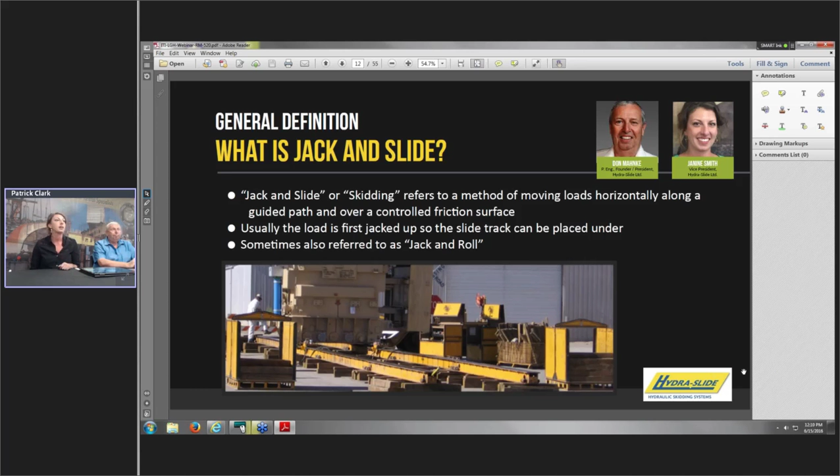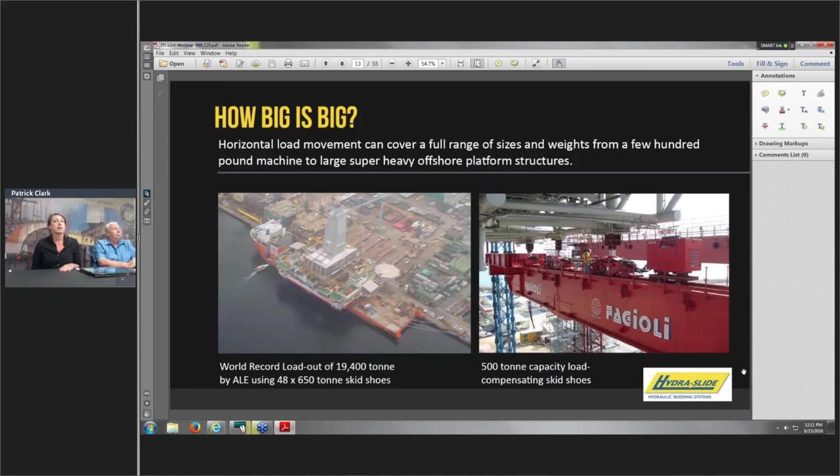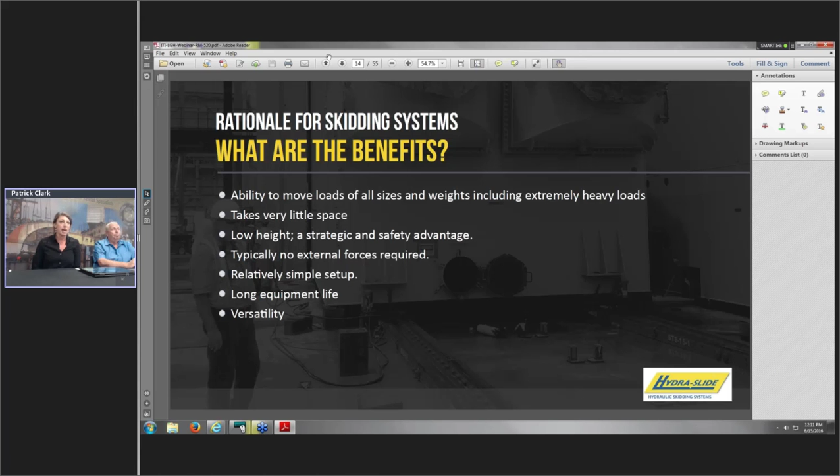Some of the benefits of using a skid system over other methods: a skid system doesn't care what it's moving. It can be used to move transformers, vessels, components of oil rigs, refinery components, machines. Everything moves exactly the same way.

They take up very little space, a very small footprint. You'll see a closer detail of the layout of the tracks and components of the skid system. Very low height — the Hydra-Slide systems have a maximum profile of 8 inches on the heaviest tracks, and it can go down to a 1-inch profile as well.

Typically there are no external forces required when using a skid system. With rollers, if you're rolling something on a low friction surface, it's not necessarily going to move laterally as intended — depending on ground support and other factors, you may need winch lines or holdbacks to stop that movement. With a skid system, it's a simple setup.

Mobilizing a crane is a job in itself — it takes a lot of time and money. In some situations it's your only option, but in others where a skid system can be used, your setup is very short and simple.

Our equipment lasts a very long time. The first systems built by Don are still being used in the field, and that's going on 30 years ago. There's a little hydraulic component maintenance and some graphite on the tracks, but not a lot of things to fail or need maintenance on a slide system. They're extremely versatile — a slide system can move pretty much anything of any size.

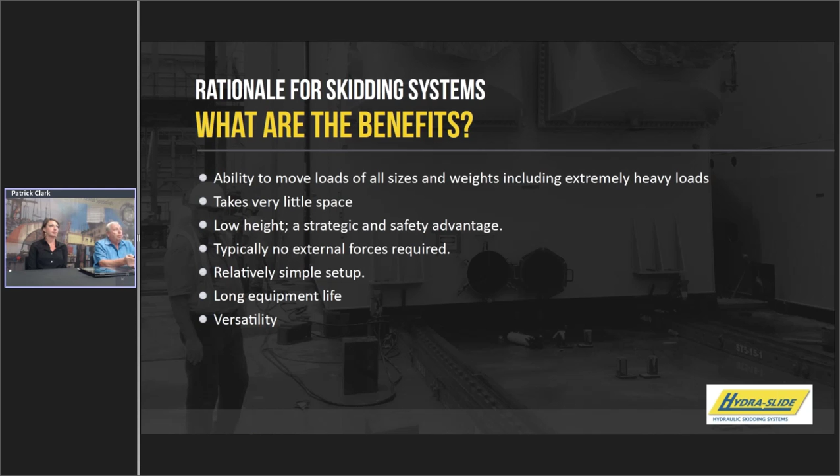If I asked most people to recite Newton's three laws of motion, most probably couldn't. But if you look at what they are, you'll recognize them right off — they're really much more of a common sense thing.

His first law: an object will remain at rest or move at constant velocity unless acted upon by an external force. Pretty basic. The second law: acceleration and force are vectors — meaning they have quantity and direction. So if you're talking about force, it's a force in a certain direction with a certain quantity.

The third law: for every action there is an equal and opposite reaction. This comes into play a lot in moving loads, because if you push against something, technically it pushes back on you. So it's often that back-force push that you really have to deal with.

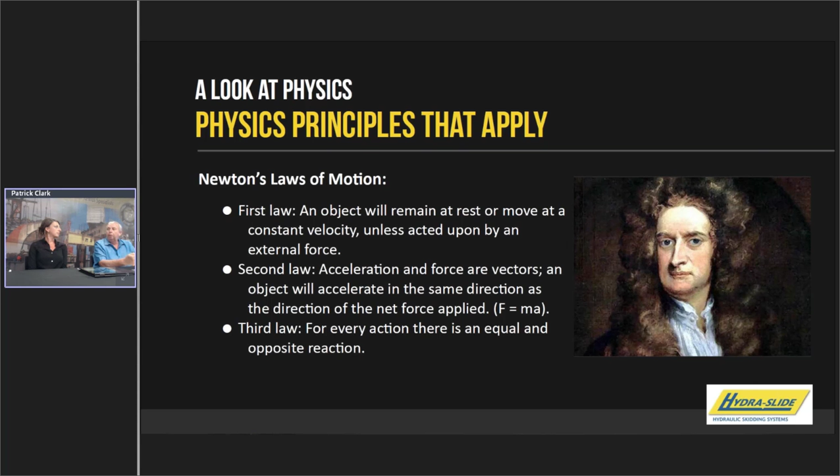Along with that, if you extend that a little bit further, we can talk about inertia. Inertia is a tendency to do nothing or to remain unchanged. And that is right back to Newton's first law.

And then we get led into momentum. That's a quantity of motion of a moving body, and it's measured as a product of its weight times its velocity. It really means that if you've got something with some weight that's moving, it's got what we call momentum. And I think everybody understands what momentum means. The really important part of it all is the energy that's involved.

If we talk about kinetic energy, that's the energy that something possesses by virtue of it being in motion. This is calculated by its weight times the square of its velocity. So if you've got something moving at, say, 1 mile an hour, if you double that to 2 miles an hour, it's got 4 times the energy. If you double that again to 4 miles per hour, it's got 16 times the energy.

So this is where, when we're dealing with heavy weights and horizontal moving, we really want to keep the speed to a very minimum to keep the energy levels down.

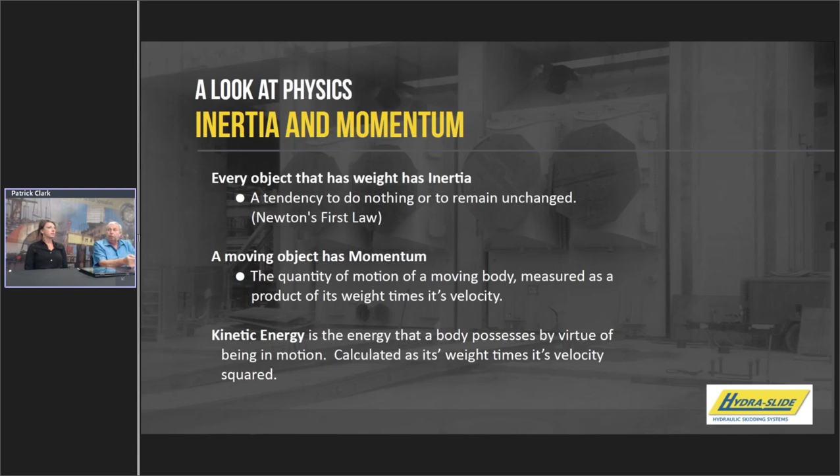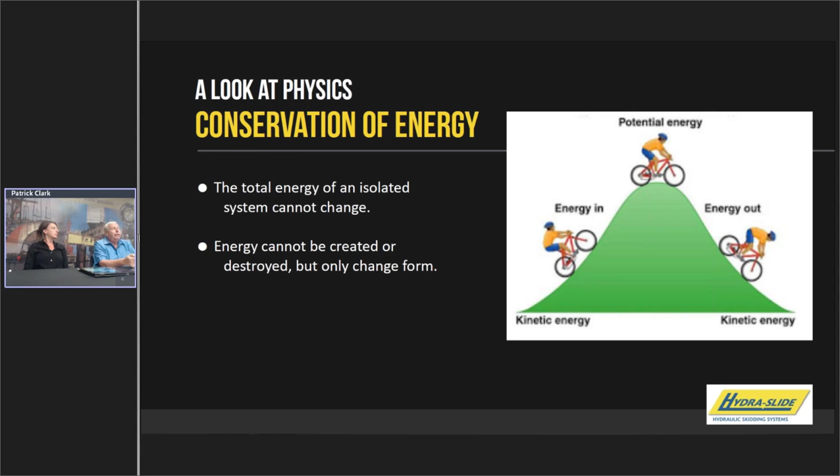Also, when we're talking about energy, there's 2 different kinds. There's potential energy that's really due to its height. This is where it comes in with cranes. If you're lifting an object to a height, you're putting potential energy in it that can then be translated. If it's released, it falls down and it builds up what we call kinetic energy, and the further it falls, the more energy it's going to have. And again, this kinetic energy is what we really have to watch out for.

And further, this is getting a little bit more into what we want to talk about today, which is friction. Friction is the force resisting the relative motion of 2 surfaces sliding against each other. And we'll often refer to the coefficient of friction, that's the ratio of the force of friction divided by the weight of the load.

And when we talk about skid systems, we're normally working in the range of 10 to 20% coefficient of friction. What this really means is if you're moving something that, say, weighs 250 tons, and you've got a coefficient of friction of 20%, the force required to move it is 50 tons. So it's going to take you a force of 50 tons to move that 250-ton load.

On the same hand, if you're moving that 250 ton on that friction, it's also acting like a braking force. It's an automatic brake. So if you stop pushing something, this friction is going to be acting like a 50-ton braking force to keep it from moving further.

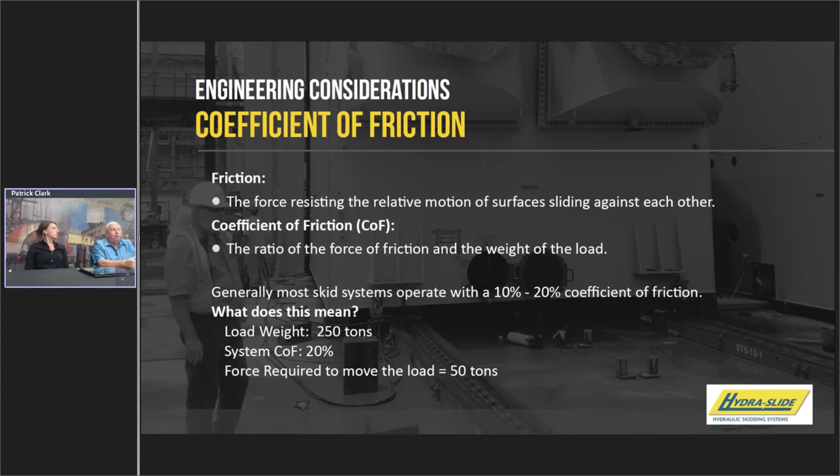So when we look at skid systems, and we'll look a little bit more at some of the applications later on, but just so we know what the components are.

And that's, as we call it, a controlled friction surface. It's something that is pretty much a known quantity and doesn't change much. It will change a little bit as it's wearing down. Humidity will affect it a little bit, but essentially you're in a controlled friction arrangement there.

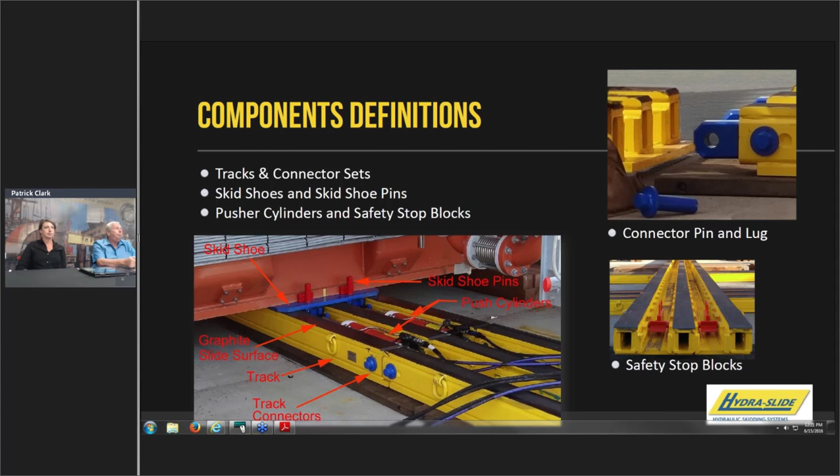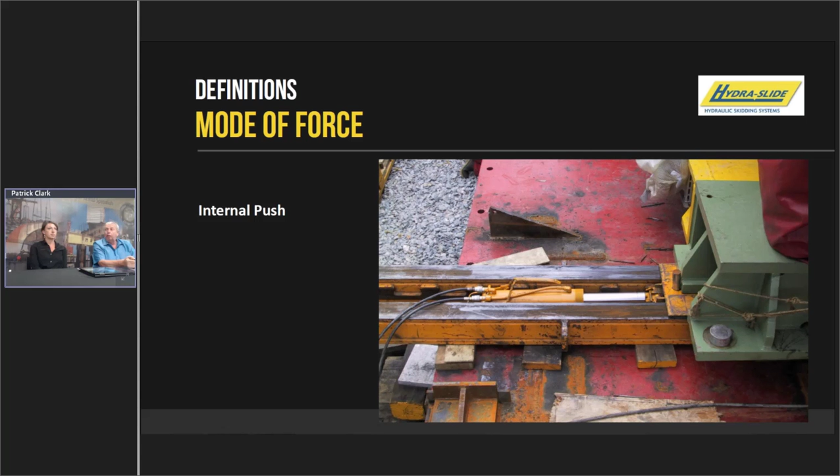Now, we talked a little bit about the internal portion. This is just another close-up view of the hydraulic cylinder in there. You can see in the bottom, you can see the ratchet track. The cylinder is pushing against the track, and on the other end, it's pushing against the shoe, which has friction between the shoe and the track. So that cylinder has a 50 to 55 ton push capacity, but that entire force is being kept within that track system itself. So nothing outside of it is experiencing any forces at all.

So we want to talk about a lot of the physics that we talked about. Which ones of those apply to the skidding system? When we talk about friction, yes, it definitely applies. We're very slow, controlled movement. Again, say we normally operate in the range of 10 to 20%. It's a very high coefficient of friction, but it acts as a brake to prevent unwanted movement. So even though it takes a bit more to push it, we have that push capacity in the track system, but the main thing is that the friction will act as a brake to prevent unwanted movement.

Guided or unguided, the skid systems that we saw are definitely guided. They will direct your load exactly where you want it to go. And when we jump back to potential and kinetic energy, since here the loads we're moving are generally moving at a very low height, very slow, you don't have any really significant potential energy, and due to the slow movement, you have very little momentum and very little kinetic energy build up. So you don't really need to take undue precautions against the buildup of energy.

And we mentioned about pulling at angles, which often you do if you have external forces. With the skid system, your forces are always directly in line with the track, so you're not risking pulling at angles at all.

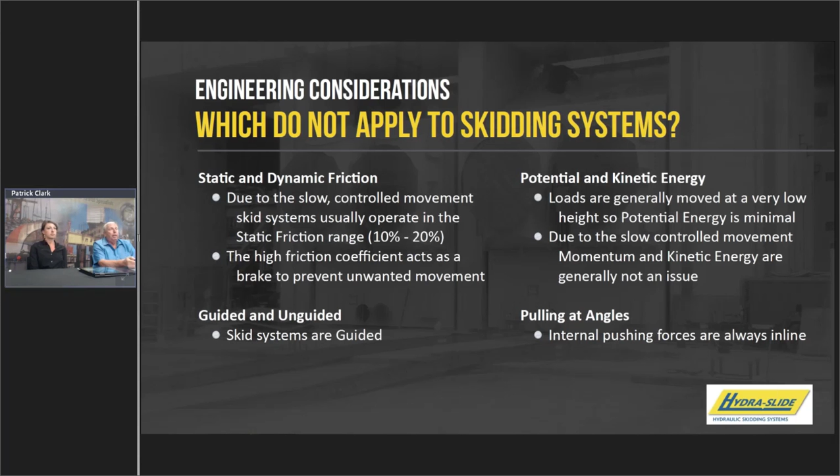You're pulling one direction, you've got winch lines around, you've got tripping hazards, dangers with the winch lines, you've got the holdbacks. If your load starts to run away on you a little bit, you have to be in a position to stop it. And once the load starts to run, it builds up energy and could become a big problem. Further to that, the guys were always in there placing the rollers with their hands. Always a concern to me for safety. We never had any injuries, but maybe that was more luck than anything.

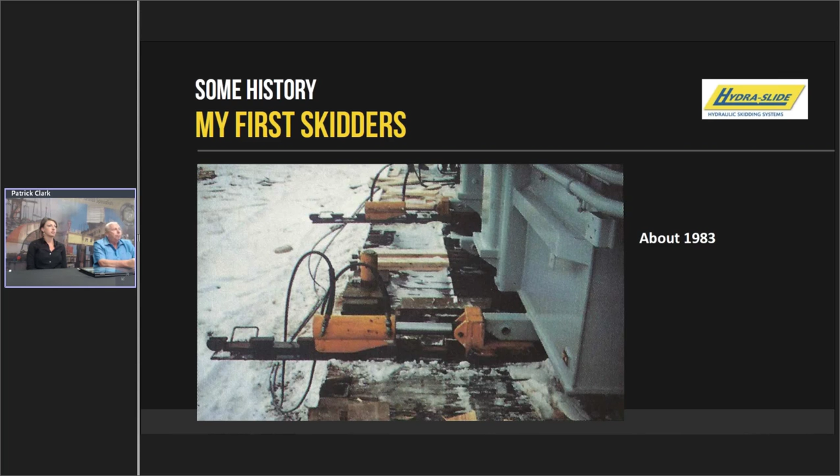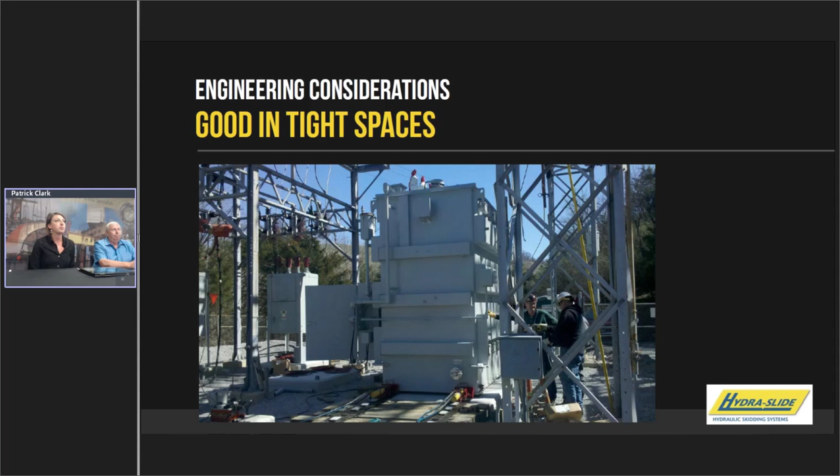That slide system there, the LP400, is a 2-inch profile, so you don't need a lot of overhead space. You need to jack maybe 4 to 6 inches to get the track underneath, lower it down onto the track, and then push. This one here is one of the heavy track systems. Don's already talked about the precise movement. Where you lay your tracks, that's where your load's going to go. There's no risk of your load going in an uncontrolled direction or ending up where you don't want it.

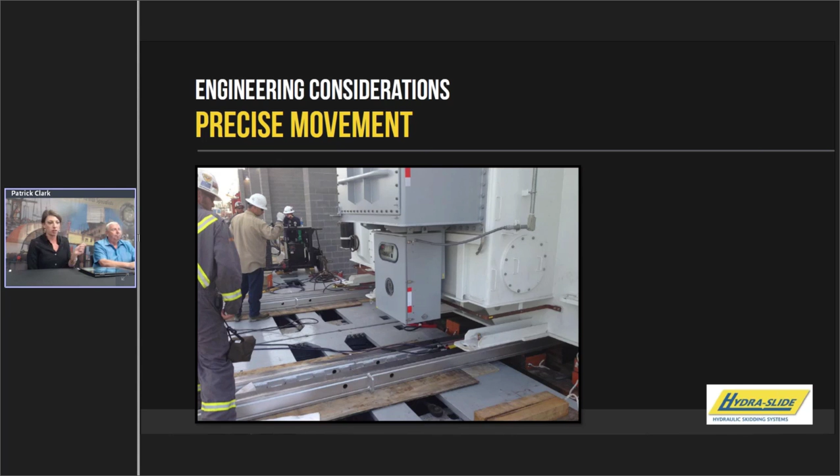And it does move relatively slowly. Some people ask, can't it go faster? If you're moving a 500-ton piece, how fast do you really want it to go? With the synchronous power units that we offer and LGH offers for rental, you go about 60 feet an hour, which is still a good rate, and your mobilization time is much reduced compared to some other equipment. So you can precisely place your load onto a transformer station, onto a rail car, wherever you're moving it, within a quarter inch. We have guys out with tape measures measuring exactly where they want that load placed.

And the surface conditions aren't that much of a consideration with the slide system. You still need to know what your ground pressures are and what kind of surface you're going on. But you can lay mats down, steel mats, wood mats, to spread the PSI out over a long span, and then place your load over it. So that's in northern Alberta, where they typically have very sandy, kind of loose soil.

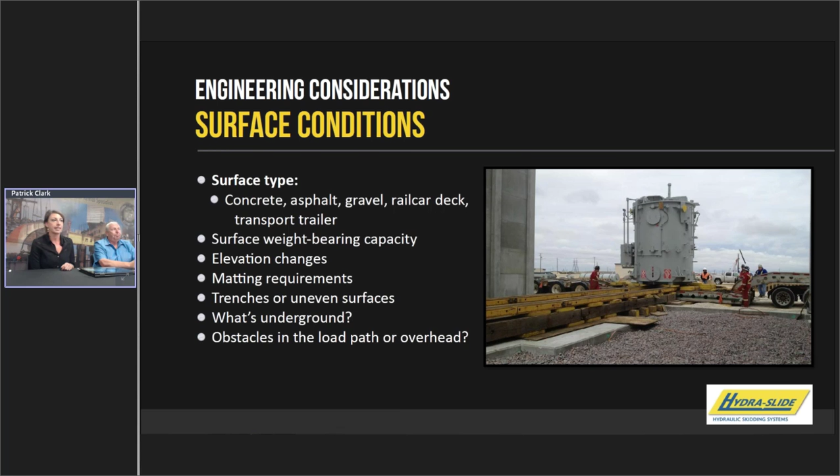This slide here is showing a vessel being skidded, and you can see in the photo that the track is spanning gaps of several feet with this load. They've basically got some blocking under the connection point, which the connection points always need to be blocked because, as you saw in the photos before, it's a pin and lug, and there is a little bit of a gap there, so there's no strength in that track at that point.

Other than the connection points, the slide systems do come with a stamped engineered load capacity chart that's on the left side of the screen, so you can calculate exactly how many feet you can span between block piles depending on the weight of the load that you're moving. The way it's read, the vertical column is your weight per skid shoe. Typically you're using 4 skid shoes. You could use more if it's a different configuration that you've set up, but we'll go with 4 for this example. And the horizontal axis is the feet that can be spanned between block piles, between blocking.

So if you look on the left, that's in 1,000 pounds. If we calculate based on a 200,000-pound transformer, which is 100 tons, your weight per shoe would be 50,000 pounds. So if you go to 50,000 pounds on the vertical axis and over, you can span a gap of 12 feet between block piles. A lot of times our customers will block a little bit more just because the safety guys and the customers like seeing more blocking, but the track is strong enough to take that load over that span.

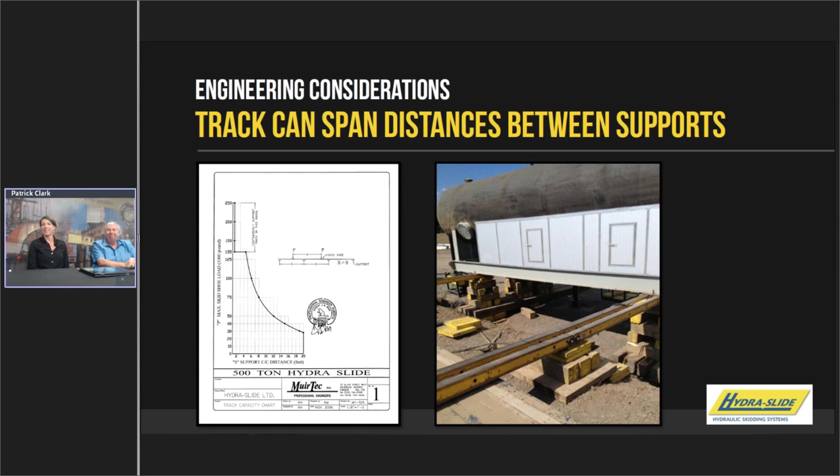And this is a photo that was taken in Venezuela, a transformer getting skidded onto its pad. One of the really nice things about the slide systems is your operator, the guy there in the front running the little power unit, he's at a very safe distance from the load. No one needs to be close to anything while it's moving. And he can position himself so that he's got a clear view of what's going on. He can see where the cylinders are, the hoses, make sure everybody's operating from a safe distance.

And there's a blind spot on the back of that transformer where he can't see, but he could have a signal person just making sure that everything is going according to plan. So very minimal personnel is required, and everybody can be from a safe distance.

And I'm going to pass it back on to Don to look at some unconventional applications, just kind of more of what Pat was talking about, that it's not just for one type of load. There's countless ways, and some of our customers approach us with, could we use a skid system for that? Yeah, that's a great idea. Yeah.

Thanks, Janine. And yeah, this is getting back a little bit more into my history, but it's to your point, Pat, exactly. The skid system, anything that has to be moved horizontally, you probably can use the skid system to do it. This was a large diameter storage tank. We had to move it on site there and then put it on the barge to take it to another town. One of the obstacles we had was we had to cross a river. So instead of building a bridge across the river or trying to take it out on the road and dealing with bridge authorities there, we put a couple pontoons in the river, laid some skid track across, and simply skid the tank across and picked it up with the transporters on the other side.

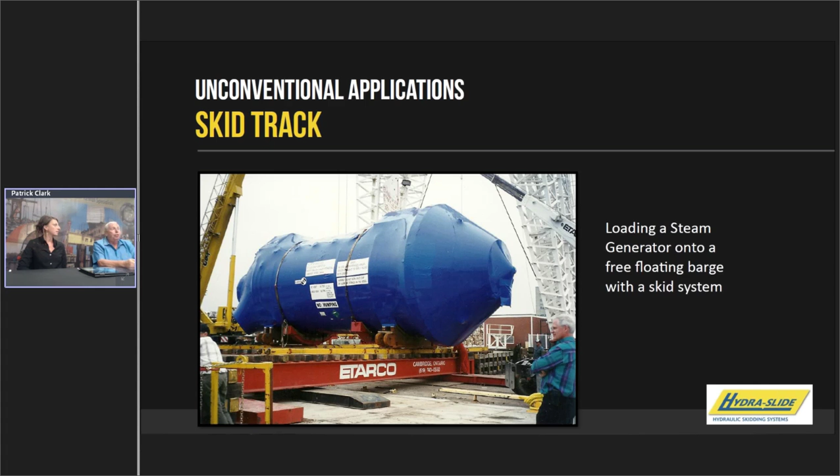This was another case of putting the generator into a very high location in a power plant. We set up a tower, used strand jacks to lift it to that height, and then pulled in some beams with skid track underneath, unhooked the strand jacks, and slid the generator into the building from the side without having to take apart the roof, without having to use a crane.

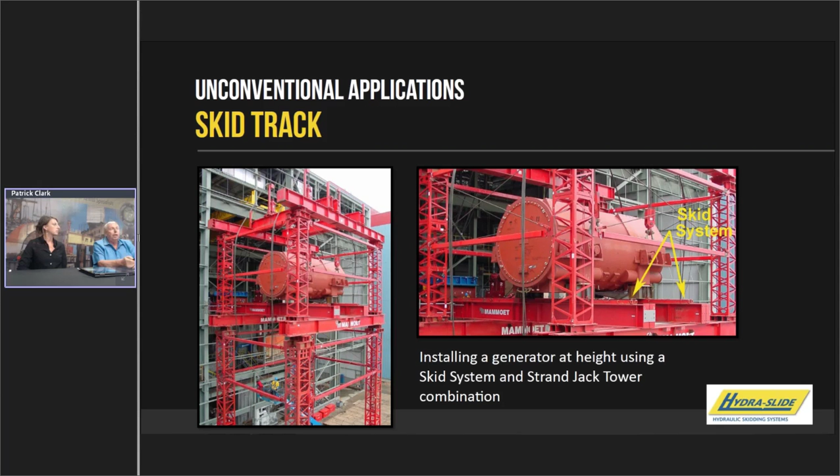So we've talked a lot about cranes, and we certainly don't want to diss cranes by any means, because they're one of the most common and useful pieces of equipment on any construction site. But because they lift loads almost cantilevered with a boom section, and the load is suspended, they're subject to a lot of different forces.

Some of the other constraints with a crane: you depend on availability, what size your load is, restrictions to the setup area, overhead clearances, which we talked about a little bit. But again, with the laws of physics, they're very susceptible to motions that your load takes. In fact, you can almost consider them inherently unstable because the load is suspended. It's only held there basically because of the weight of the machine.

It's on a balance. You've got the load hanging off the end of the hook, which can be balanced by the counterweight, the overall weight of the crane. Should any of those things change - if your load weight increases or your lift radius increases - those will increase your overturning moment with no correction in the righting moment.

You can also get into influences from wind, or ground instability - say your crane sinks down a little bit. That's going to have the effect of moving your boom out, increasing the radius that you're lifting at.

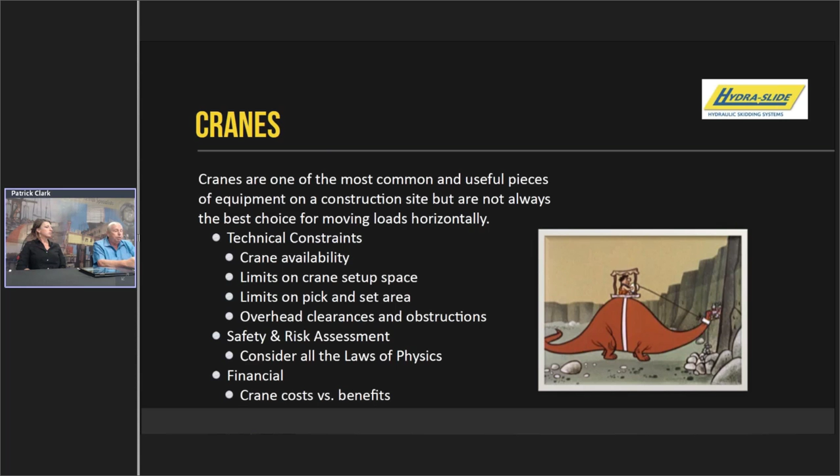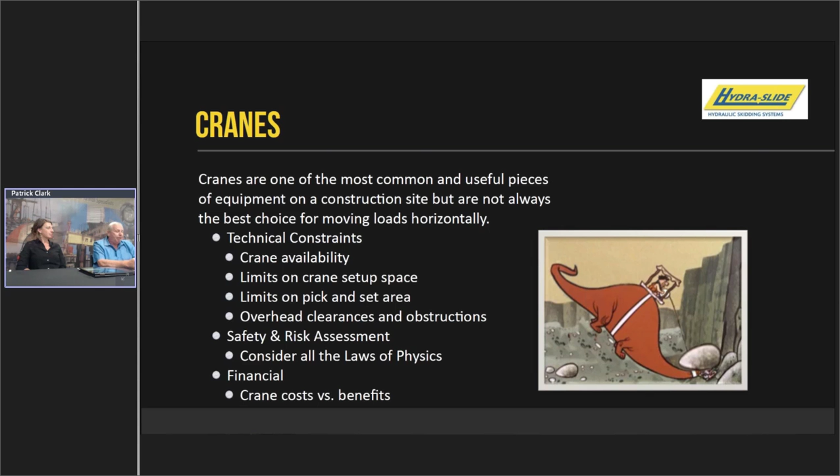And I've got to apologize for the next slide a little bit here. If you go a little bit too far, lift a little too heavy, you risk the instability of the crane. So again, my apologies for a cheesy slide.

It's a little bit labor intensive, with small equipment. It takes a certain amount of time to set it up and to use it, so it doesn't make that much difference whether it's moving a 50-ton load or a 400-ton load.

Whereas a crane, it's almost the opposite. If you've got a 40 or 50-ton load, it's very easy to get a hydraulic crane, pull in, pick it up, and move it - it can be fairly simple. But with cranes, once you're getting to the higher end, several hundred tons, maybe 500 ton, your crane costs become rather exponential.

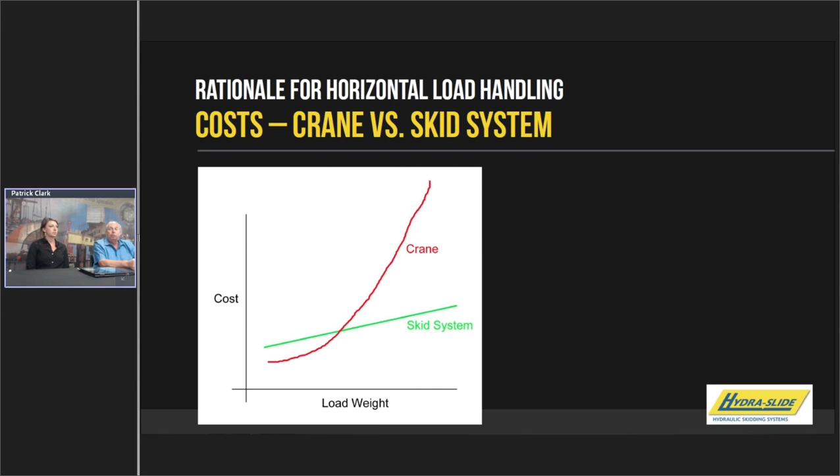Where we were, normally the crossover point was somewhere between 80 and 100 tons. Below that, if you could use a crane, sometimes it's more financially feasible to do it that way. Once it was over about 100 tons, it much more favored the skid system. That's a good bogey to consider.

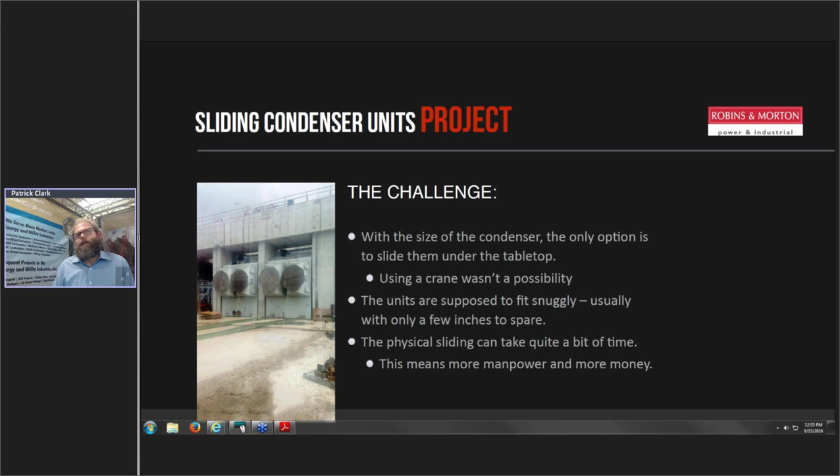So we're going to walk through in a moment here a 3D animation that you're going to show us. You're also going to show us some of the installation of the track so people can kind of put the whole piece together here. Please go on.

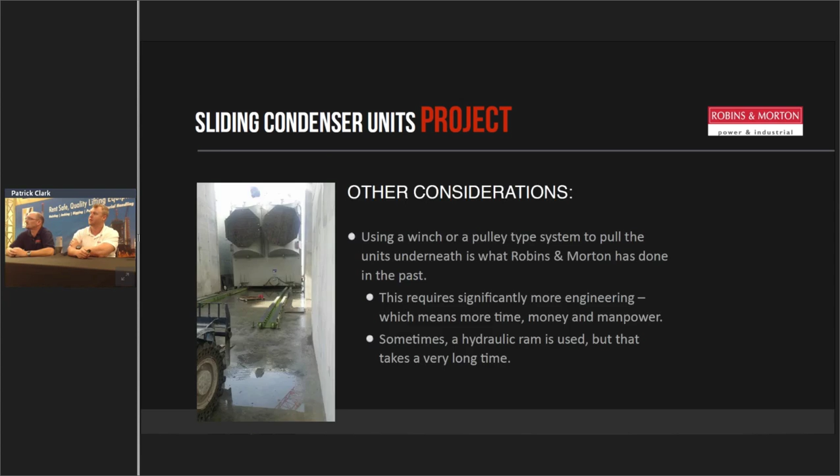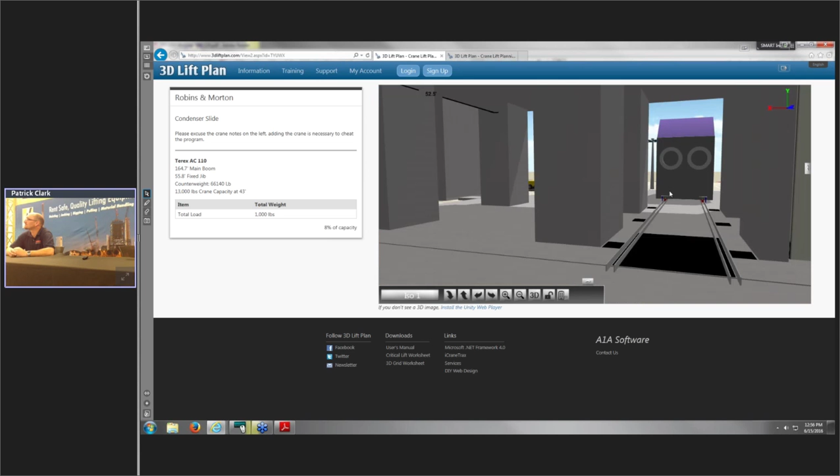All right, so if you want to jump over here, Sonny, we'll get you on the 3D animation. So here's that same view again on the other side of the STG. This is how far we had to come in. This right here is a 6-foot pit, and Lifting Gear Hire and Hydra-Slide supplied us with all the information we needed to know how much pressure we were putting on these tracks throughout here. This essentially shows you everything - that's your STG tabletop, and then here's the view from the other side.

Well, I guess it's just doing whatever it wants to do, Patrick. But yeah, it gives you a better, larger picture of what was going on.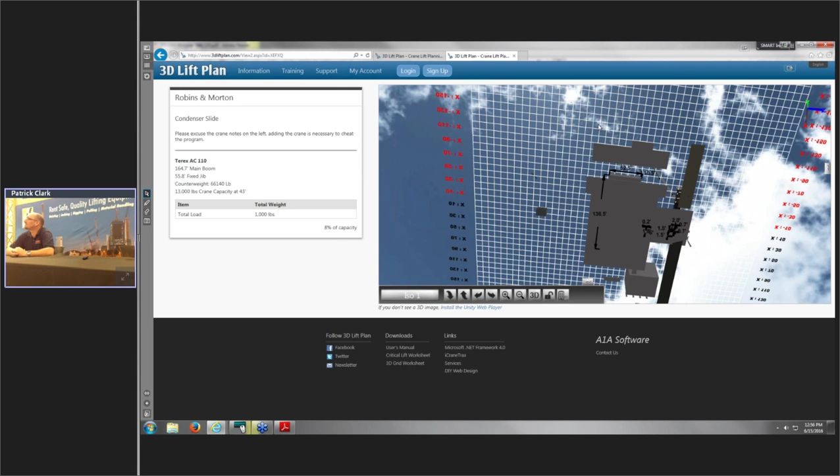Oh, you can switch to this channel. You can switch to this one too. Is this the one you're showing first? Yeah, that just shows a good view of everything.

Okay, so this is in your planning stages. What's this for? Who's benefiting from this? This is a 3D lift plan that we drew up. We had to show the client what we were going to do, how we were going to slide it. This is actually drawn to scale, so it shows the dimensions, and using the cut sheets provided by Hydra-Slide and Lifting Gear Hire, we were able to know exactly what to see if this was going to work or not.

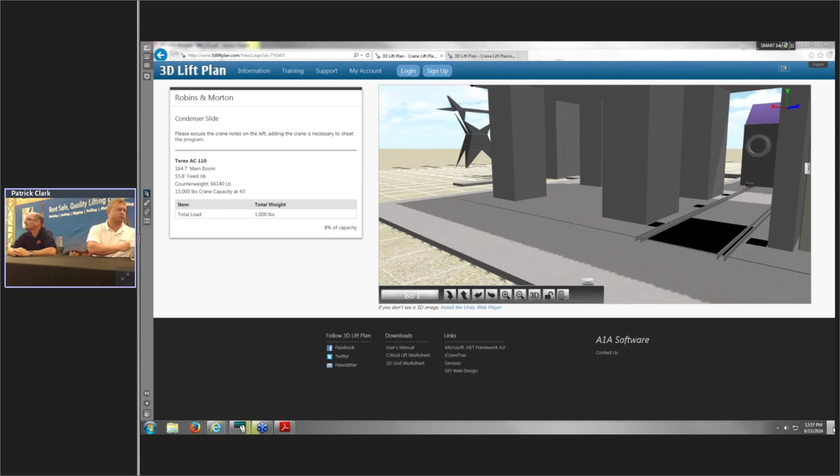Okay, so what are we doing here? So right here we're flying tracks into place. Now these tracks are really light. They've got 4 pick points, so it's really easy to go in, and they just link right together. I mean, it's just like Legos.

And one of the good things about the system is it's minimal manpower putting this together, instead of having a crew of 20 people trying to fabricate something. Like you just said, it's put together like Legos. Put it in place, use a crowbar, get it pinned up, and you're moving along.

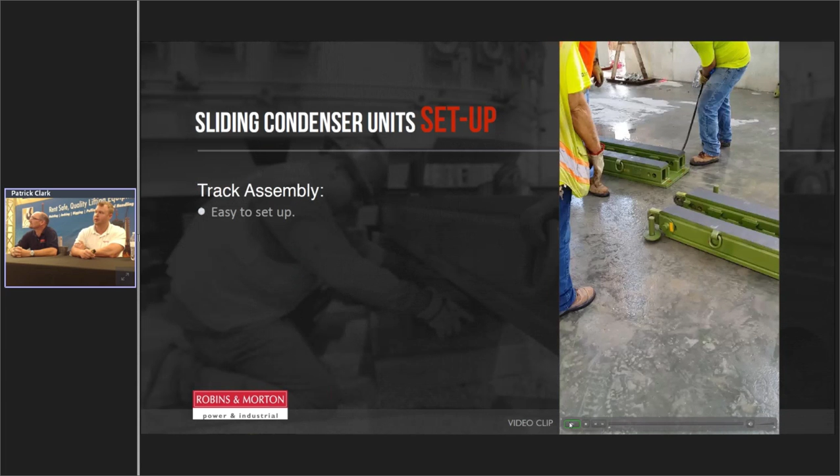Actually, this next video shows how light they are. That's actually just rain on the ground—it had just rained. They're just scooting it around with a crowbar and putting it in place.

And you see right there some of their connecting bars, as Don explained earlier, and then they just get pinned together. You can see in that picture the pre-designed lift points already on the system, so you're not trying to bull rig something in as well. They've already done all that for you.

Right, okay. So right here you see a picture of the condenser unit underneath the engineered jacking section for it.

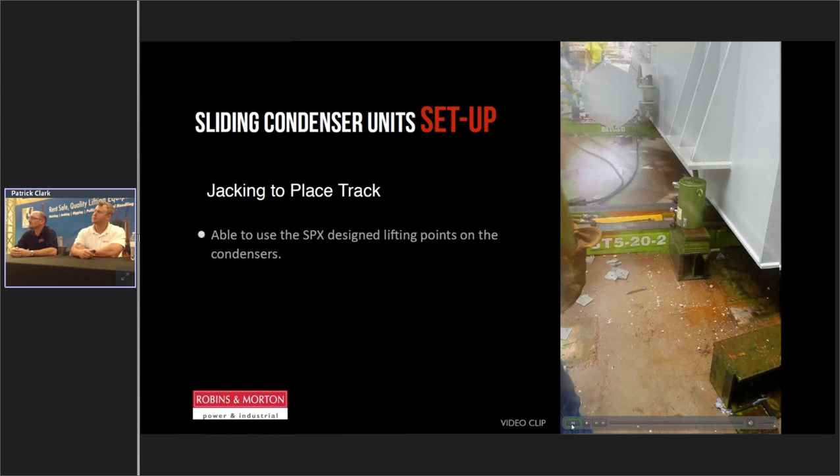So after you've used the hydraulic cylinder and jacked up, now at this point it's on the skid track, and I think we saw this cylinder here advancing, actually doing the pushing, right? Yeah, okay.

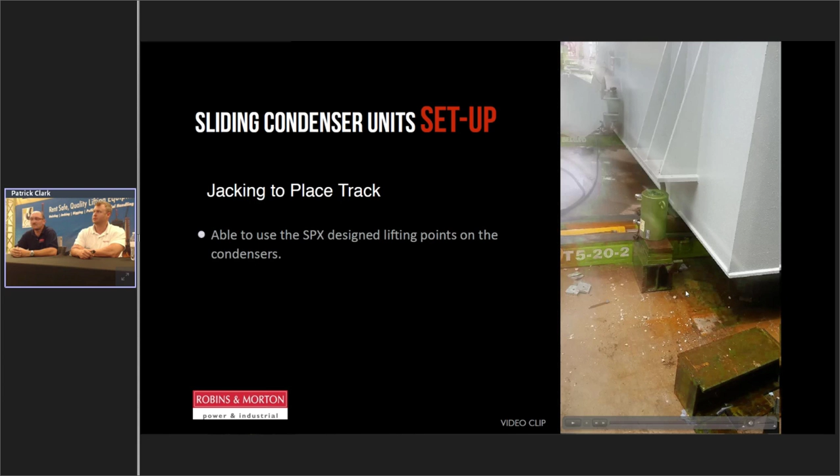One of the best things about this system is you're not constantly resetting a jacking system. The hydraulic cylinders actually come out and reset themselves on the next set of lugs, so you're not sitting there moving them every single time. That saved us a bit, because normally you've got people positioned at each cylinder having to reset them as you're going in—with their system, you don't have to do that.

Yeah, that's also where you can run into a lot of problems, as far as shifting something to the side. These things work simultaneously, and they both hit the same set of tracks at the same time as they reset themselves. We had probably 4 guys run this whole show, putting it together and moving it in.

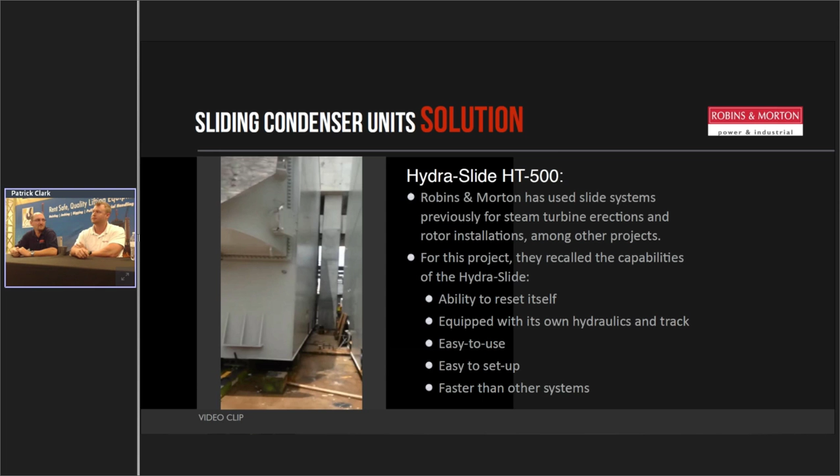We saved a lot of time, labor, and engineering hours. We saved home office hours too. We got this done really quick, and it was extremely safe. I actually had an elevation change—we went from a 6-inch jump up in the air onto another slab, and everything went fast and fine. We really did not run into any issues with this.

If you're worried about using it with Hydra-Slide and Lifting Gear Hire, they actually sent a guy down to show how to use the hydraulic system. He ran our guys through it real quick, and we slid these into place, no problem.

How important was that to you? Was it necessary, or? I think it's an easy system, but it's good to show people how it works. And both companies, I think, are very safe first and foremost, especially when you're moving in 300-ton plus units.

This all sounds great, and it almost seems like a love fest, a sales presentation going on.

What, you know, that Billy Mays fellow that used to sell OxiClean on TV, right? That guy. Really, what challenges did you have?

What didn't go as expected using this system? There's absolutely nothing I can say that went wrong. I wish I could complain about something.

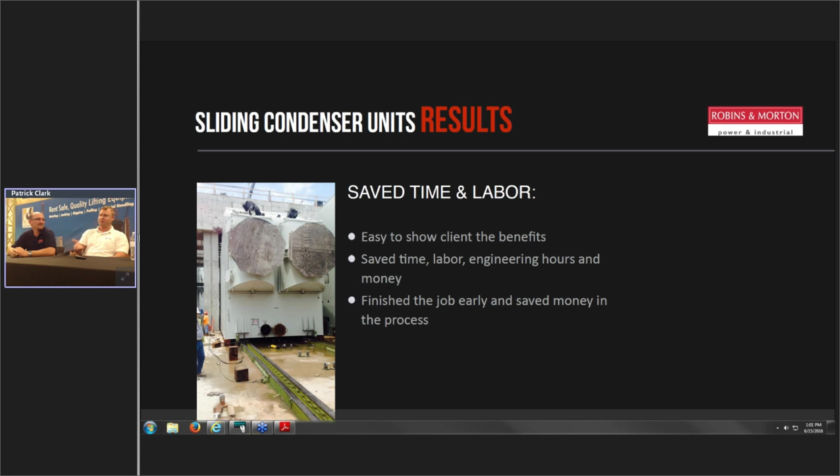Like me and Frank have said, normally when we build one of these things, we just hodgepodge it, building a piece here, a piece there, shooting from the hip as it goes. And if we've got to get engineers involved, we do. But these guys have got all the engineers taken care of, all the parts and pieces are taken care of. It snaps together like a Lego set. It's easy, and there are so many different applications you can use this for.

I would highly consider it before thinking about using a crane. If you really can't figure it out, you should just call Lifting Gear Hire anyways, or call Hydra-Slide if you want to purchase one. Lifting Gear Hire can get you one, and if you can't figure it out, they can come down there and show you how to use it. And if you still can't do it, Frank and I can come down there and do it.

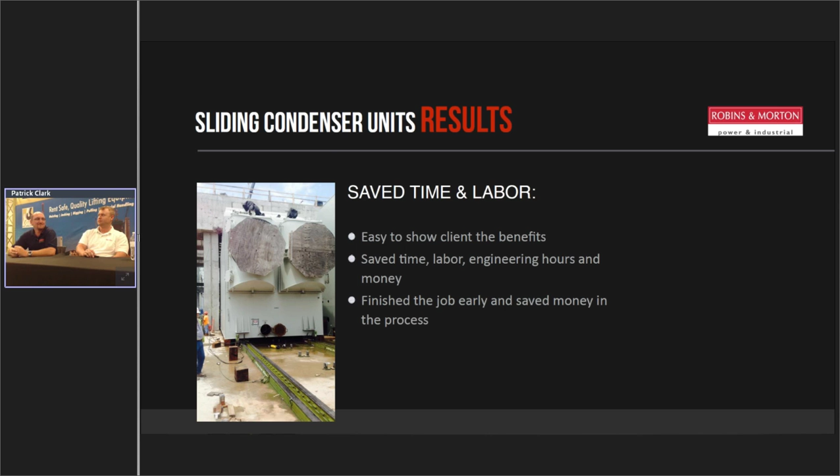We went out to dinner last night and had an excellent time. Got a chance to learn about each other. Why are you covering up your face?

So, these are real guys, and it's always a testament to have them come in here, and a little bit from the standpoint of support from Hydra-Slide as well. They've been phenomenal about the training and the support for us. Lifting Gear Hire, the reps, we really appreciate that from a standpoint of tenure. We're unmatched there when it comes to rigging. We have well over 800 years of rigging and material handling solution experience on staff, and that's something other companies can't even hold a candle to. So again, we value you guys as a customer.

Expect to do more with you, as long as I don't make fun of you too much, Sonny. I think you'll come back, right? Right. Is there anything else you want to talk about here?